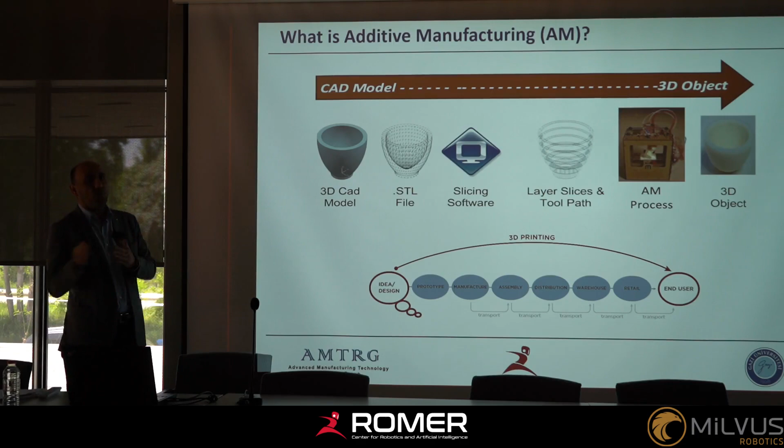At the end of the day, we will have basically smaller or less lead time when we compare to the conventional processes.

Of course, we can do lots of classification on additive manufacturing, some of them technology based and some of them material based, because we are using a raw material to produce the parts. So this is one of the classifications.

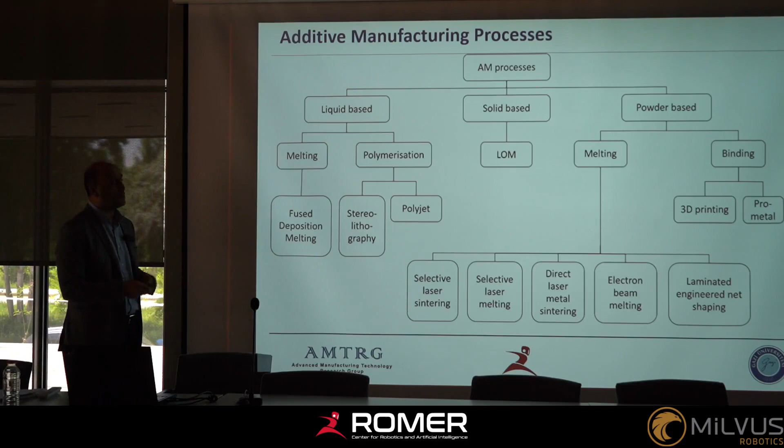This is mainly the material based classification, because some additive manufacturing technologies use liquid based materials like resins, some of them use solid based materials, and some of them use powder or wire type of materials.

But in fact, at the moment there are 7 main additive manufacturing technologies available, and they are commercial as well—they have the machines basically.

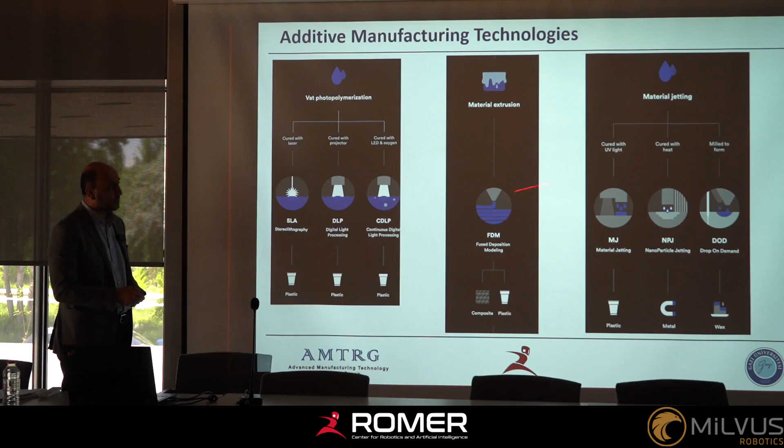The first one is vat photopolymerization. Basically, we are using a heat source or a light to make the resin or polymeric material cure. And we have the material extrusion process and material jetting process—these are mainly using polymeric materials as raw material.

And binder jetting, this is another technology. Powder bed fusion, which mainly uses metal powders, is now actually the most mature technology in additive manufacturing at the moment.

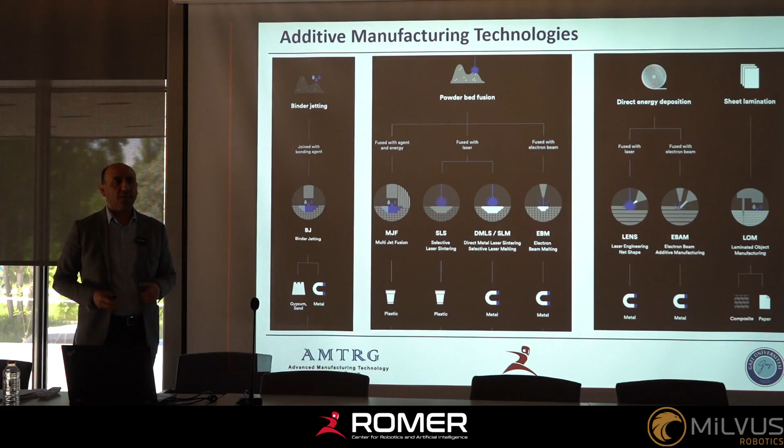And direct energy deposition, and also the sheet lamination process. These, as I said, are the 7 main additive manufacturing technologies that are commercially used in the industry at the moment.

As I said, different mechanisms and different manipulations are used to make the 3D parts. When we use the material as polymer or composites, basically we either use light, laser, or ink to make the 3D parts.

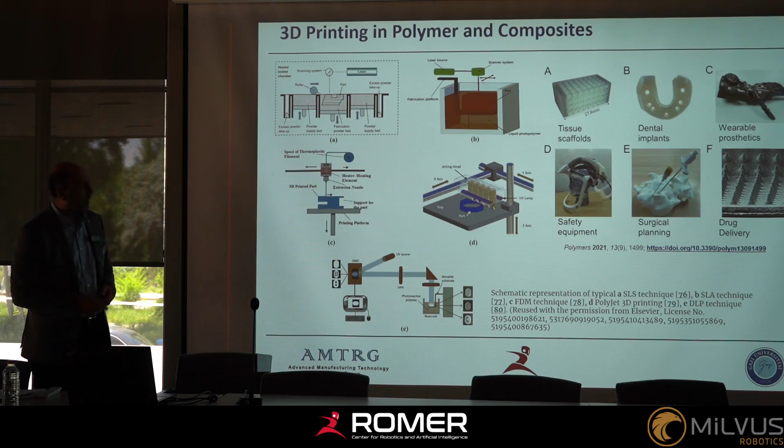But on the metal side, we have to have some energy source, and we use that energy source mainly to produce the part or to melt the metal, either powder or wire.

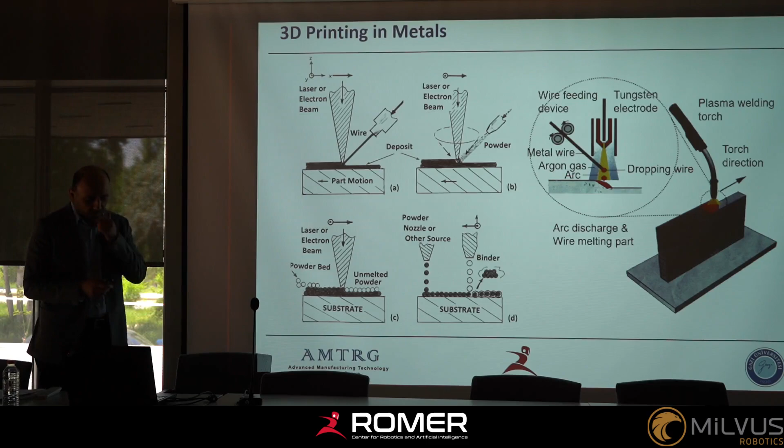So it could be laser, electron beam, or arc, in some cases. We have to have a large heat source to melt the metal, because metal melting temperatures are higher than polymers. So therefore on the metal side, basically we generally prefer to have high heat sources.

Of course, when we compare each additive manufacturing process, there are some advantages and disadvantages between each other.

For example, if you would like to produce a complex geometry, powder bed fusion process gives a high rate of complexity, but on the other hand, WAM, which is wire arc additive manufacturing, gives less complexity.

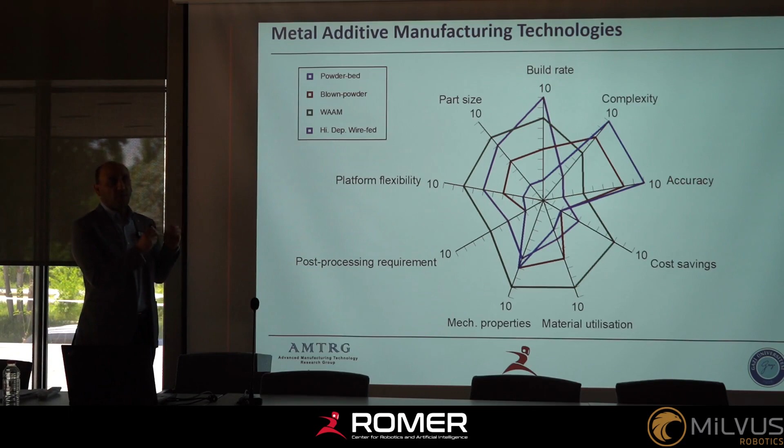But when you take a look at the part size, the WAM process may have more advantage—the position, build rates, platform flexibility, mechanical properties, these may differ. So therefore, we choose the proper additive manufacturing process based on our design considerations, and where and for what purpose we are going to use it.

And of course, researchers like you and us try to make them as mature as possible and spread them in the industry, to make them applicable in real parts or functional parts.

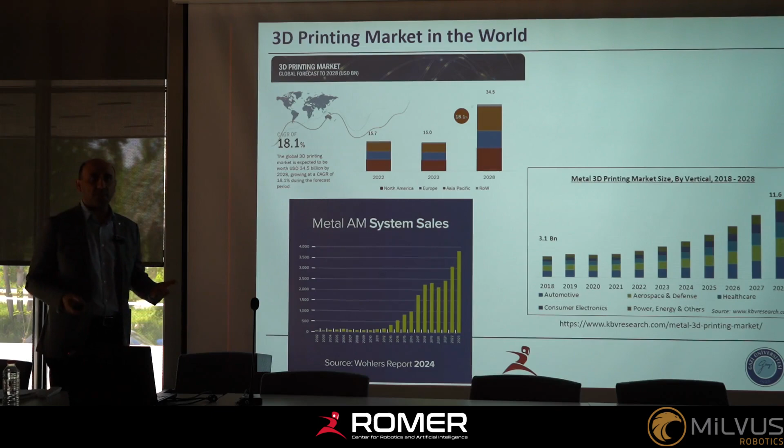But metals are now growing more because the metal part is more functional than the polymeric part. We use polymeric materials generally for rapid prototyping, but metals are used mainly for functional parts.

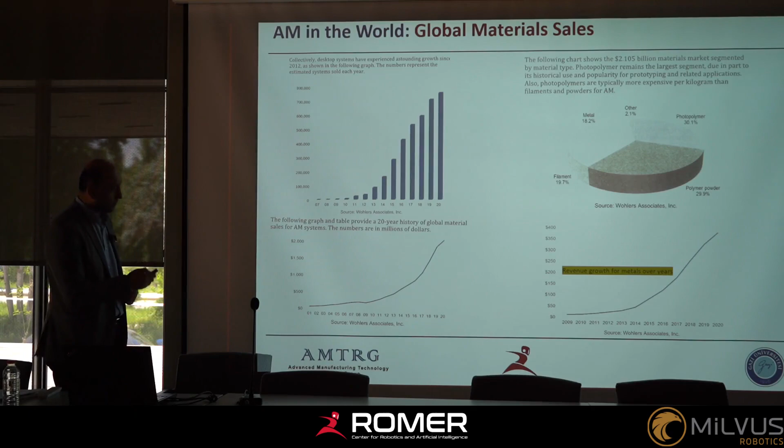These are some of the metals we currently use in additive manufacturing, like stainless steel, aluminum—these have the largest percentage—and also titanium. Titanium is mainly preferred by the aerospace and defense industry. Stainless steel is common for die molds, and aluminum is also used for die molds and for prototyping as well.

But there are also lots of other materials getting some percentage of use as raw material, like stainless steel, Inconel, which is a nickel-based alloy, tool steel, and some Hastelloys, etc.

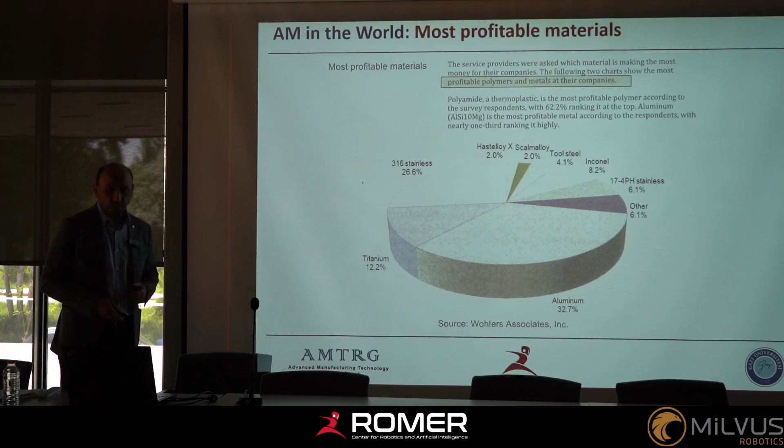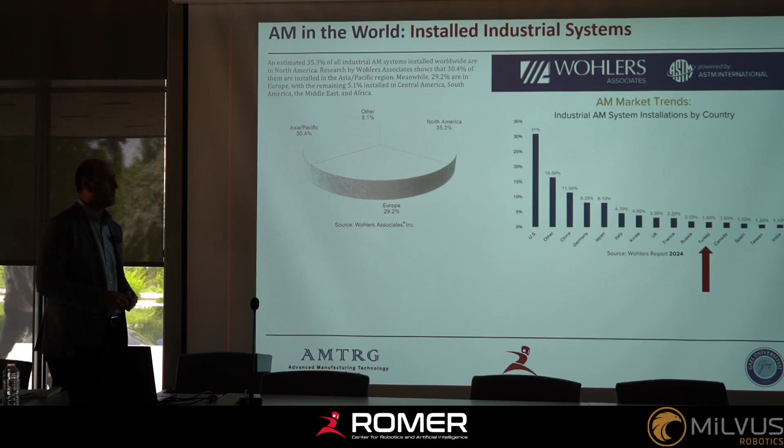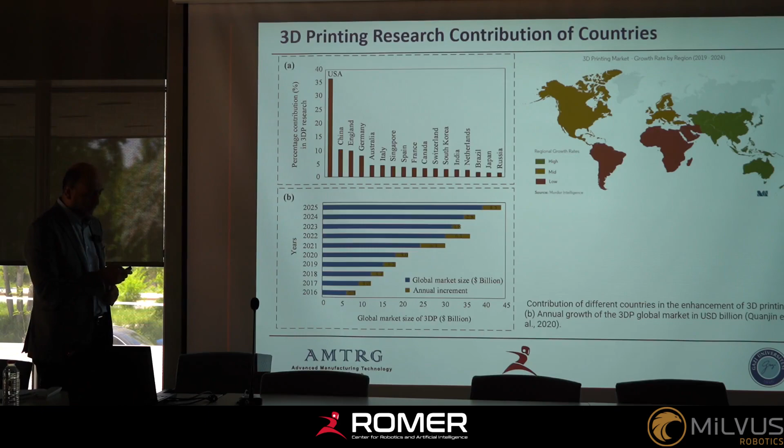These are some other statistics on how 3D printing research has contributed over the years—as you can see, lots of papers are appearing in journals. So it's a hot topic trend in research and also in academic papers. Okay, so that's it.

Well, now I'd like to mention what we do. I have a research group which I call AMTRG, Advanced Manufacturing Technology Research Group. When I came back from the UK, I founded this research group. The members are mainly my MSc, PhD, and postdoc researchers.

So what we do basically—I have almost 20 students, some postdoc, some PhD, and some MSc students. A few of them are staying with me, and some come from companies like Aselsan, Tusaş, Roketsan, etc. I also have some postdoc researchers, some of them my former PhD students, but I have two postdoc researchers with me as well.

What we do basically is focus on metal additive manufacturing and additive manufacturing in general. For example, in one of my research works, we mainly focus on how the laser interacts with the powder, because when we produce parts, we have to melt the metal. In the melting process we use a heat source, the laser, and we study how it interacts with the powder, how a melt pool is produced on the metal surface or layer, and how we can get the proper process parameters to obtain high quality parts.

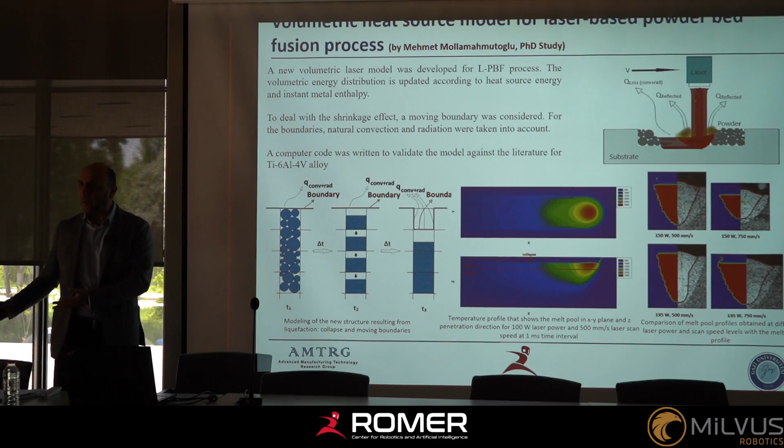This research work involves multiphysics—we sometimes try to derive thermal equations, we deal with the metal powders, and we deal with the laser. So therefore this is multiphysics.

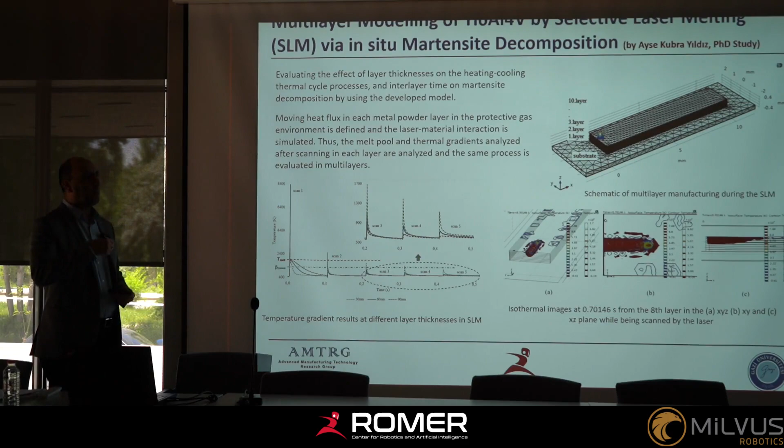In another work, we try to determine that because when the laser interacts with the powder, it melts it, but the molten powder solidifies very soon, in milliseconds. So the phases formed are basically the core of the mechanical properties—if you control the phases, you may control the mechanical properties. So in this PhD work, we try to control the phases during solidification, with the final aim of obtaining the proper parameters and conditions, and planning the process to get the best quality parts.

On additive manufacturing, the surface is not good because we use powders. So when we take a look at the as-built surfaces, they have large surface roughness, lots of waves. We don't like it because as a mechanical requirement, we need very smooth surfaces in order to have good mechanical properties. So we search for how we can improve it.

One solution is laser. We use laser to make a remelting on the surface and polish it as much as possible. This is the new technology, actually.

We tried this a couple of times and did a few projects. One of my former PhD students, who has now graduated, worked a lot on this topic. We directed the laser beam on the surface to create a thin remelt layer, which produces a smoother surface compared to the as-built surface. We call this laser polishing. Of course, it is still under research because we face problems like cracks due to high solidification rates, which we don't like, but we still work on it.

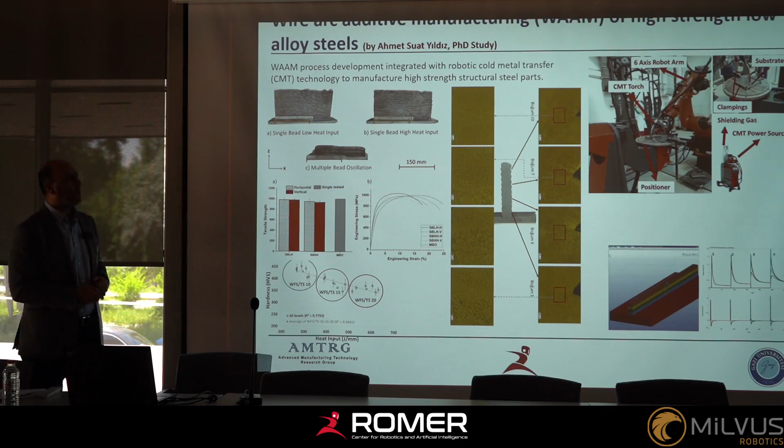Another of my research works uses WAAM, where we use robots and an arc heat source to melt the wire and produce the part layer by layer. We did a lot of mechanical and metallurgical tests to determine how to improve it, which process parameters to use, and what kind of heat source or heat input we need to give the material to achieve proper conditions on the parts. So we did a lot of tests.

In one of my works, we worked on a design approach. This is the conventional design part, although it's also topologically optimized since there are holes in it. But we worked on it and tried to make a new design for additive manufacturing, then produced that part, which is used as a bracket to hold reaction wheels on satellites. This was an MSc work result, but we did it as a project and have results as well.

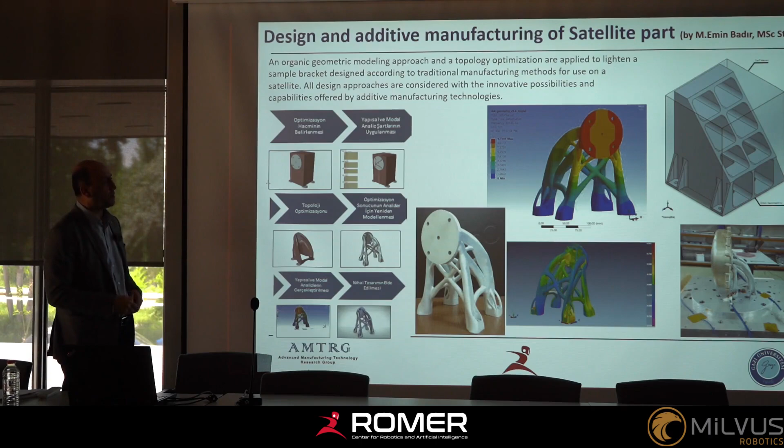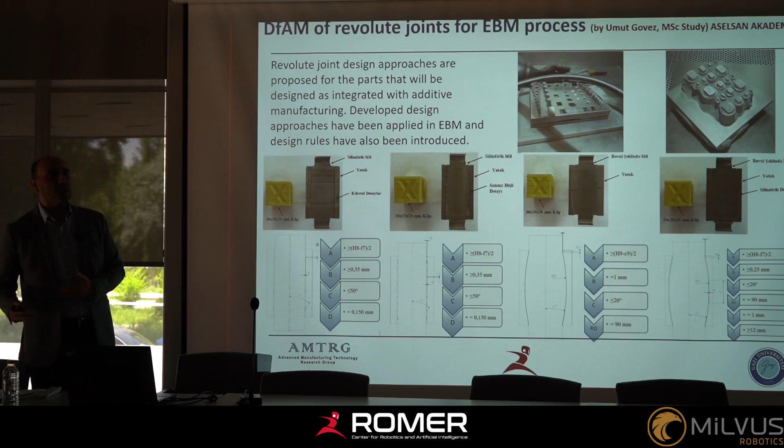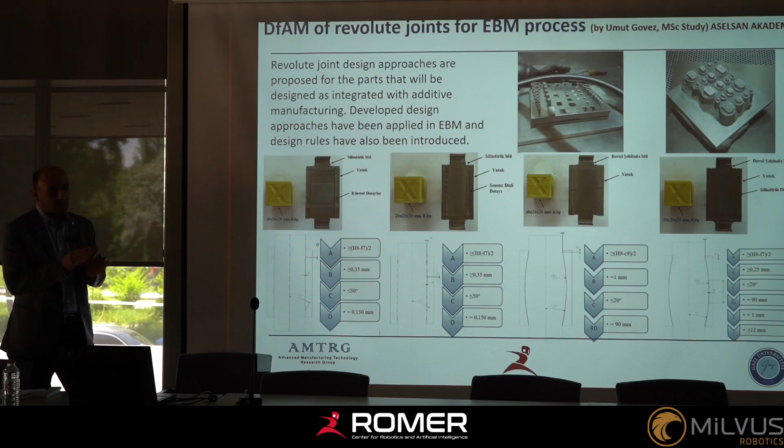In my research work, I collaborated with Aselsan and one of my MSc students to design parts that are already assembled — meaning revolute joints. We tried to obtain the correct process parameters for such revolute joints. There are two options: you either produce the parts individually and then assemble them, or you produce it as a consolidated part. We prefer the consolidated design because it's cheaper and faster. This is also a new area in additive manufacturing, since there are gaps in that field, so we focus on it.

In another research work with my students at Aselsan, we worked on sheet metal lamination. We use ultrasound to perform the welding process, bonding sheets together, which is called ultrasound welding or microsound welding. This allows us to do layer-by-layer manufacturing. This is the setup we designed and produced, and we try to use new sheet materials to make ultrasonic additive manufacturing. This might be unique work in Turkey, especially regarding sheet metal lamination.

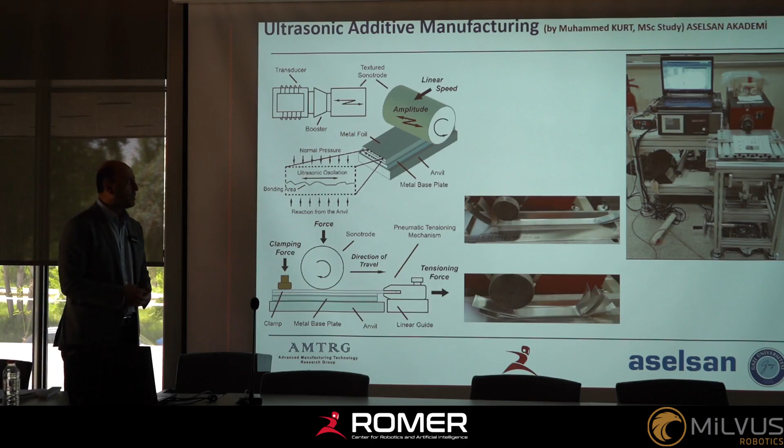We also worked on different designs, because additive manufacturing enables new design approaches. Since we have flexibility in manufacturing, we can create organic shapes. For example, this bracket works under random vibration — normally 3 or 4 parts are produced individually and assembled together, but we produced it as a single consolidated part. We then performed a lot of random vibration tests to check if it satisfies the requirements.

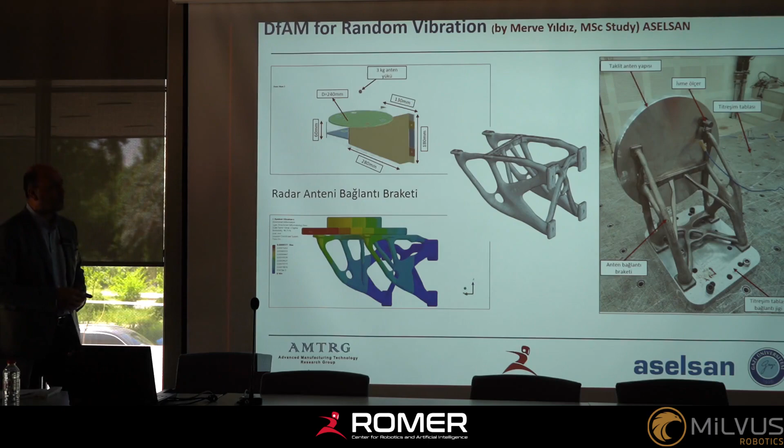Well, basically on the WAAM side, which is wire arc additive manufacturing, which I use a lot, and also my company MetalWorm also focuses on WAAM. I started that work in 2010, which was the first work in Turkey. So we actually designed these, the very old-fashioned design, which I spent 10,000 Turkish liras to build.

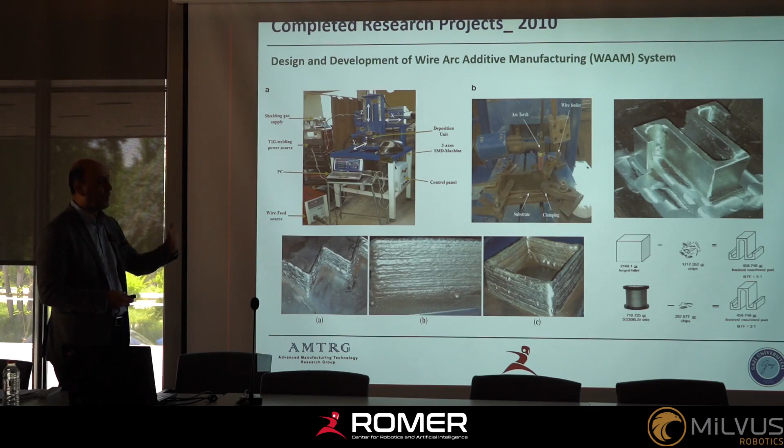But we first did work on the new attempts of how we built the metal layer by layer. And then actually we use robots because it's more feasible and gives lots of flexibility. This is a work that we actually worked on together with FNSS, which is a side project, and then we try to build some big size and large size parts by using robots and welding machine, as you can see, and also a positioner.

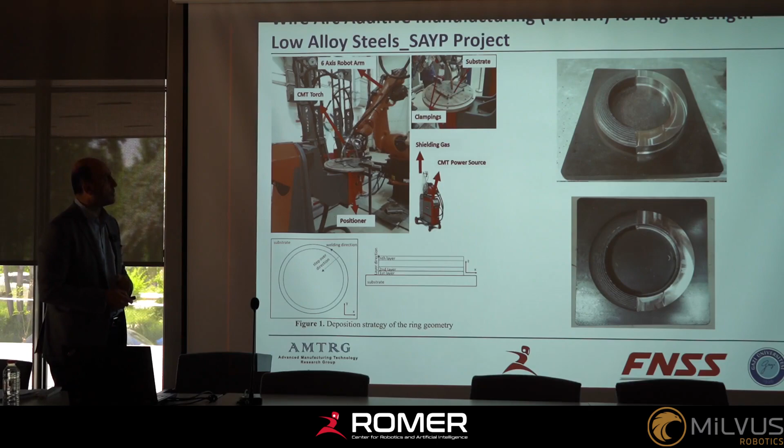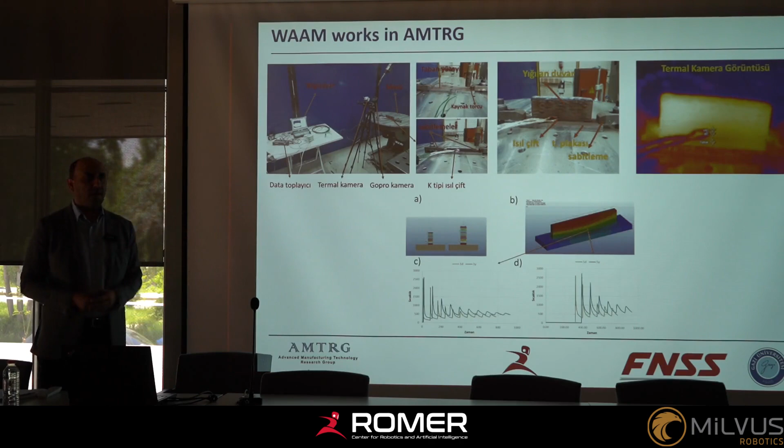So therefore, for this part, only the robot is enough, or maybe the positioner is enough, but in many cases we actually have 8-axis manipulation to produce the parts. We did lots of tests, mechanical tests, metallurgical tests, to actually prove that this process is suitable for production of large-scale parts. And also we got some temperature measurements, because during production we melt the metal, so we apply lots of heat. That heat produces some distortions and unwanted effects, so we have to optimize it.

And also I started work with Intecro Robotics, which we actually started in 2015. We decided that for this robotic-based process, we need to have a machine. The machine should have some hardware and software, but there is a need in the industry, because additive manufacturing is growing, and there are some attempts on the robotic additive manufacturing side, but there is no specific machine for it. So we actually started to work with Intecro, and we submitted a research project to TÜBİTAK, and TÜBİTAK funded us.

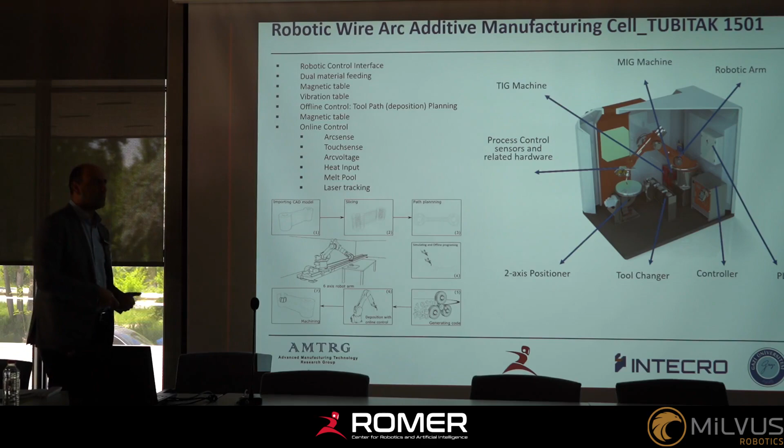And then basically we developed this MetalWorm machine. As you can see here, now we have a robotic system, a positioner system, and we have software on the offline side that we can use to produce robotic tool paths to create 3D objects, as well as process monitoring software, because we need to get some data during the process, like voltage, current, heat source, heat input, layer height, etc.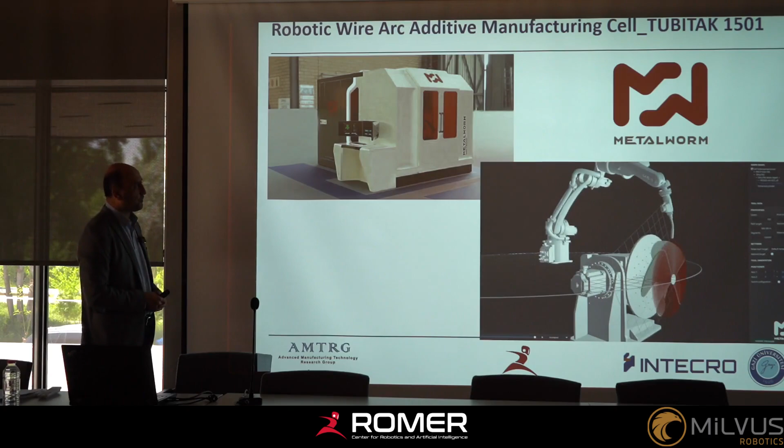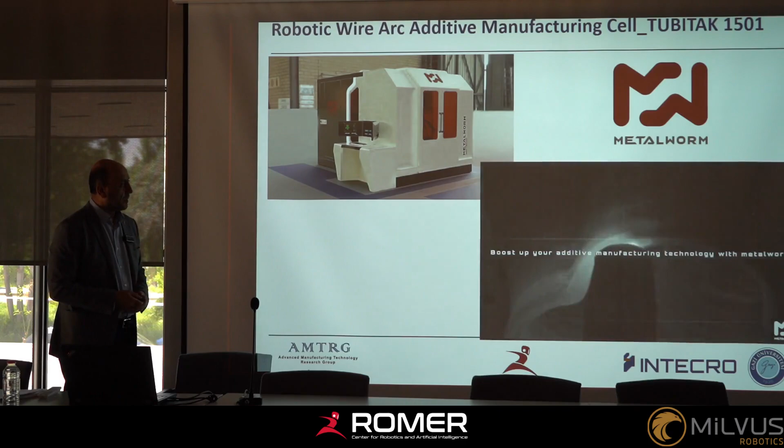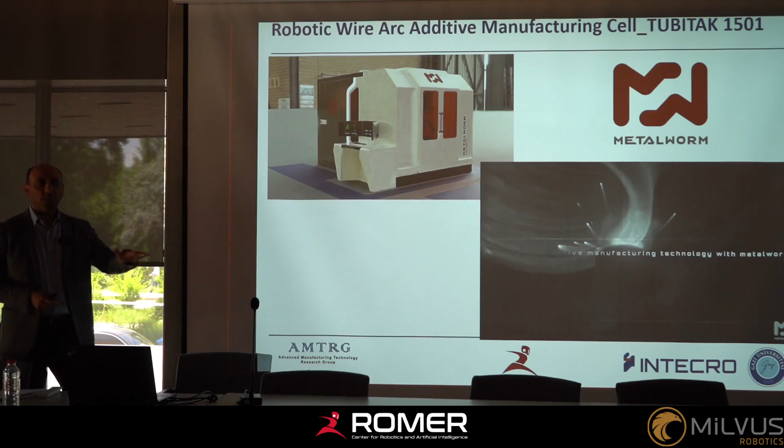This is now a commercial machine, so we try to sell it now, and also we do lots of production by using this machine. Basically, once we released this machine to the market, at the same time in the world there were 3 or 4 companies that released the same machine. So we may say that we all think about the same.

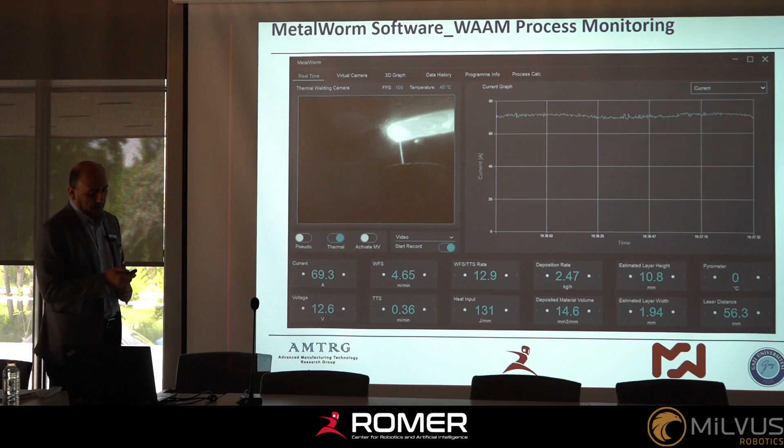And this is the process monitoring software that we use basically. As you can see, we collect all the data from the process, and also we have a welding camera which focuses on the weld pool, and also we can capture the temperature in the weld pool area. It is very useful for us to collect this data and to plan the process for the best applications. And also, as I said, we collect the data so we can create the digital twin of the part.

What we do basically is get the current, voltage, wire feed speed, heat input - these are some of the data that we collect. And then we merge it with the coordinates of the robot, and then we can create that kind of digital twin of the parts. What we use it for basically, in additive manufacturing, we actually do the manufacturing layer by layer.

So in commercial manufacturing processes, especially for the aerospace and defense industry, they need certification. And in that certification, you have to supply all the data that you use in your manufacturing process. So in additive manufacturing, you have to also give all the data for each layer.

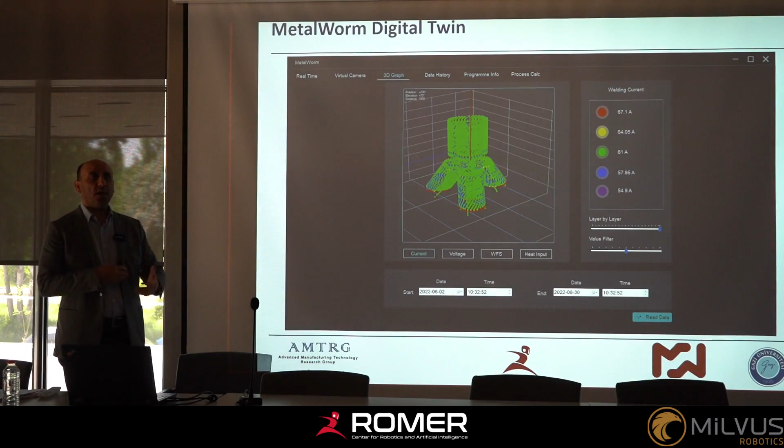So in that case, firstly, we give all the information or all the data, as I said, for process parameters for each layer, as well as we may check it for quality control as well, because you may have some intervals for each data, and if you are going to see some kind of peaks, you may actually check your part and then see what will be wrong in the process. So therefore, it could be used for quality control as well.

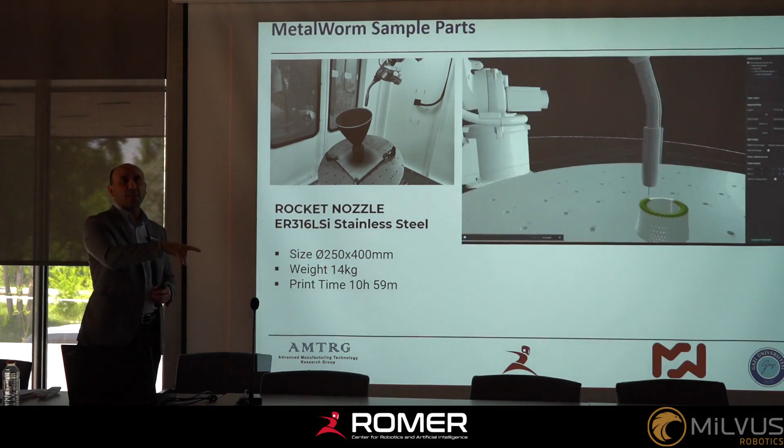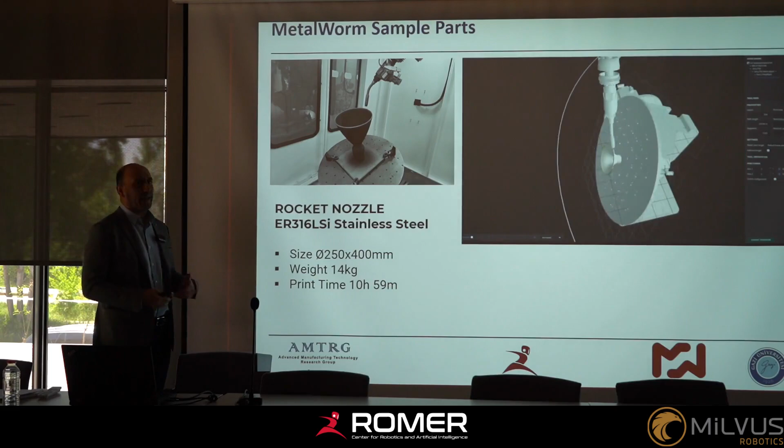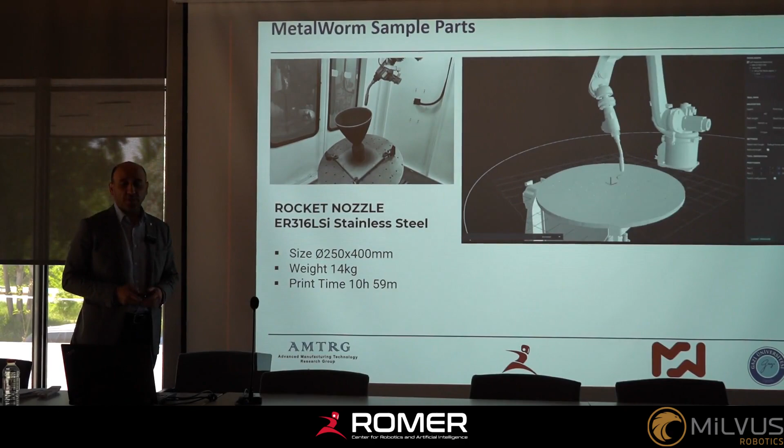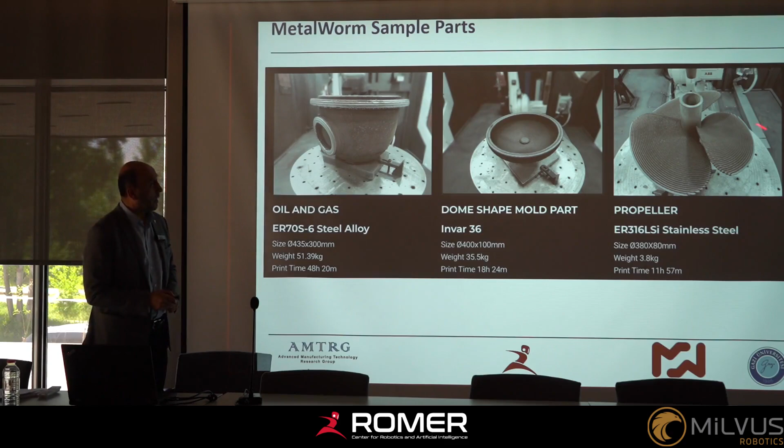By using metal WAAM and robots, we can create different functional parts. This is one of the oil and gas parts. This is one of the metal composite die parts which we produce for TUSAŞ, Turkish Aerospace. And this is one of the propellers that can also be used in marine applications.

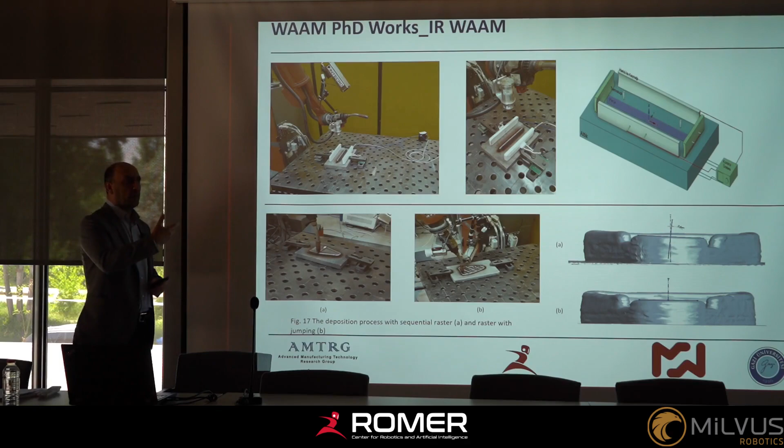On the WAAM side and the robotic side, we try to improve the process as much as possible, because we observe that we apply lots of heat, so we have to control the solidification. In my PhD research work, we worked with metal foams to make a heat barrier, so we try to cool down the parts as slowly as possible. Then we control the residual stresses, the solidification, and the microstructure formation as well.

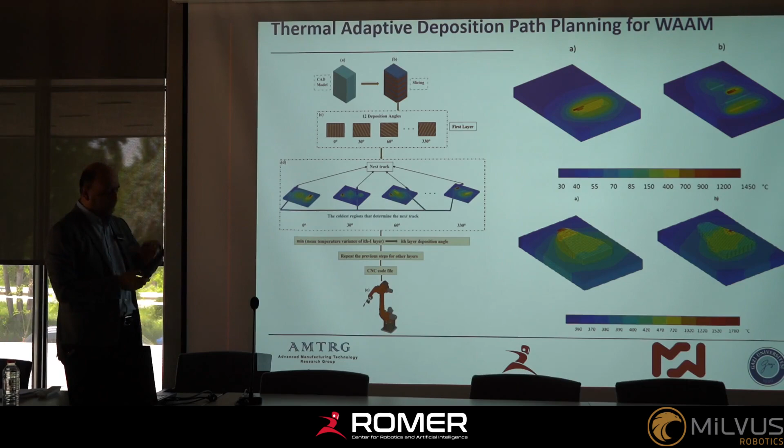In another work, we observed that when working on a small area, you apply lots of heat on it, which causes distortion, warping and some faults. So we tried to make an adaptive toolpath planning on the robotic side. This is another one of my PhD works with my students. He developed an algorithm that senses where the heat is dissipated more, so it produces another section of the part, builds some layers, then comes back again and produces more layers. By doing that, we try to dissipate the heat as much as possible to reduce distortions and make the geometry as neat as possible.

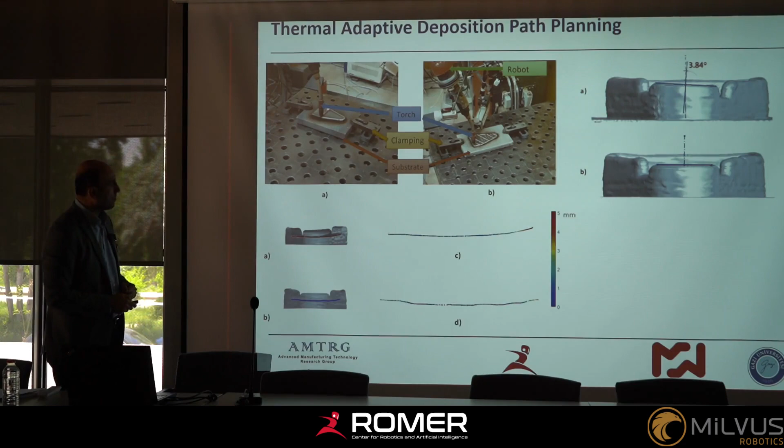I also work with TUSAŞ on some critical parts on the powder bed side, and with TÜBİTAK Uzay, where we developed a reaction wheel bracket, because on each satellite there are 4 brackets that hold the satellite to the platform. These reaction wheel brackets weigh about 4.6 kilograms, and when we redesigned it using biomimicry, we reduced it by 1 kilogram. In a space application, 1 kilogram can be worth $10,000 or more, and since there are 4 brackets, we save 4 kilograms. This is how we designed it and processed it.

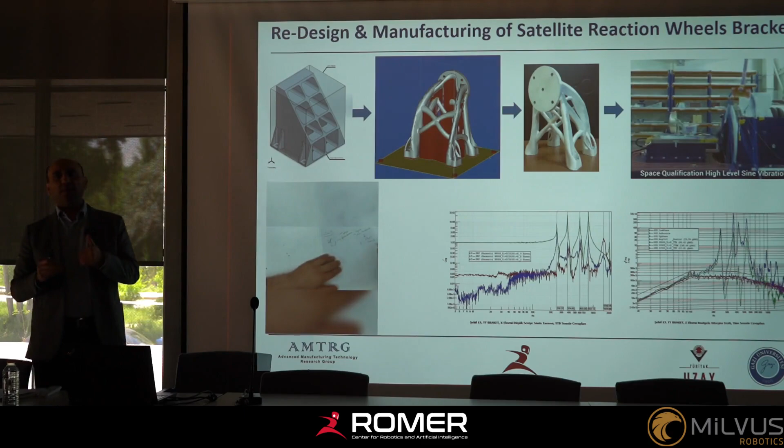This is more important because once we designed it, we first considered that it would be under vibration, specifically sine vibration where it moves like a sine wave. When we tested it, we got cracks on the surface around here, and we realized something was wrong with the design. They asked if we had considered random vibration, and we said no. They explained that while there is sine vibration, in some cases the frequency and amplitude may also change. So we redesigned it, reproduced it, and tested it again by shaking it like this. It's a really high level test, and as you can see, the part passed now.

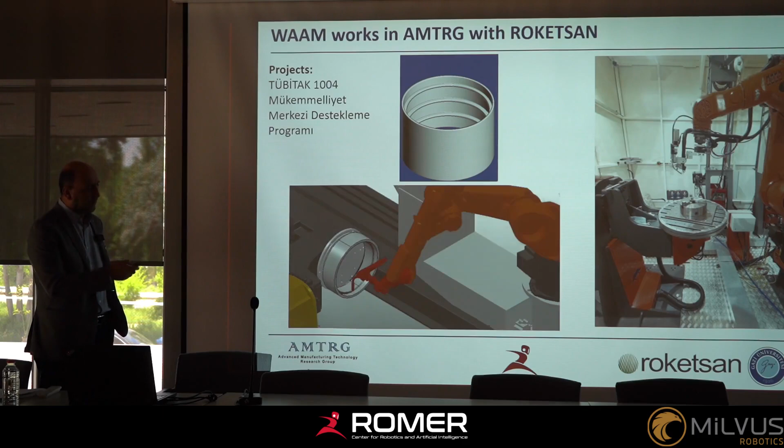I also work with Roketsan on the TÜBİTAK 1004 project. In this project, we try to generate toolpaths on a sample part that could be used in Roketsan's defense applications. The project mainly involves generating toolpaths for the robotic WAAM system, since they have a WAAM system as well. I started working with Roketsan about 8 years ago, and they now have 2 systems, with heavy focus on WAAM.

On the surface side, we had a project with TEI in Eskişehir, where we again tried to reduce the surface roughness of metal AM parts using electrochemical machining. We removed material at the atomic level and tried to reduce the surface roughness as much as we could.

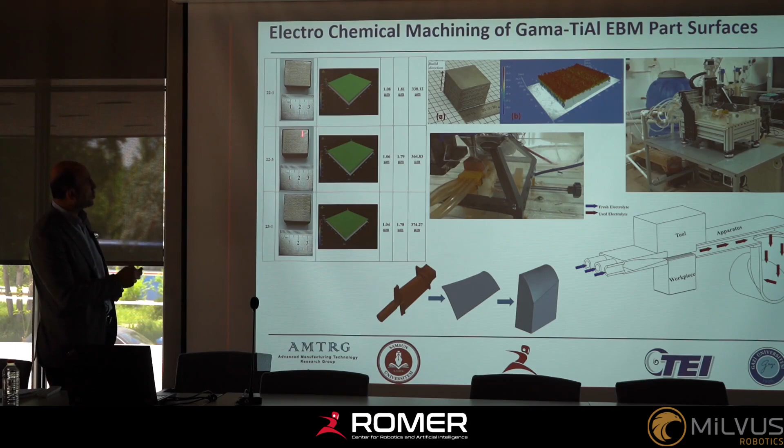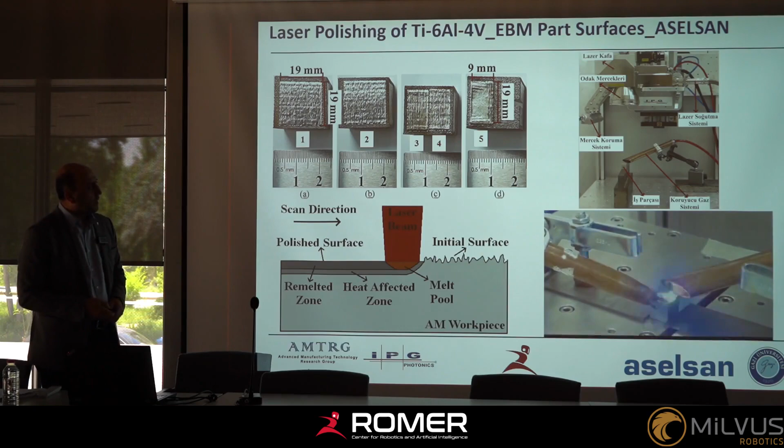After completing this project, TEI also got interested. Then we got a 6-month research project where we worked on titanium aluminide, a very unique material. We tried to polish some surfaces, and in that project we used robots to manipulate the laser heads, as you can see here.

Although we generally prefer laser polishing on flat surfaces, in this project we also focused on form surfaces, trying to polish blade surfaces. Since they produce the blades by additive manufacturing, the surface isn't good, so they want to make it as smooth as possible.

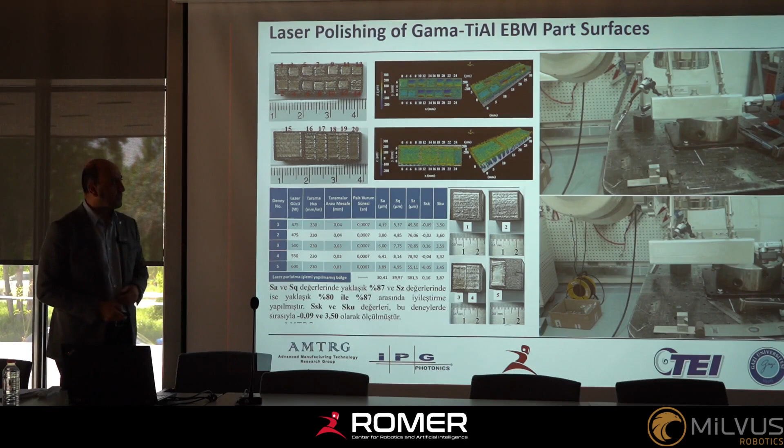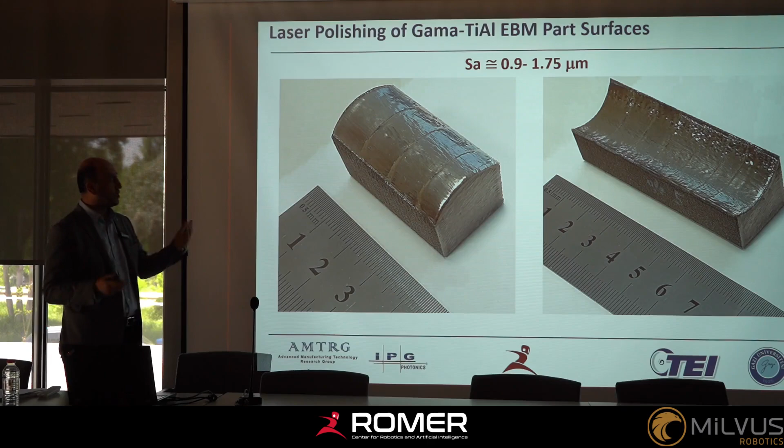These are some of the convex and concave surfaces that we polished. It's still not a mature technology, it's under research. As you can see, there are patches and lines—these aren't intentional, but we're trying to make the whole surface polished without lines like this. So we still work on it.

On the laser side, we continue working to give some parts higher fatigue strength and life, so we work on laser shock peening. Basically, we take additive manufacturing parts and send laser shocks, like bombarding them, to produce compressive stresses on the surface, which increases the fatigue life.

We did lots of tests on it—this is one of my TEI projects again, and also my PhD student's work; he's about to finish his PhD. We observed that we actually produce compressive stresses, which are very beneficial for improving fatigue.

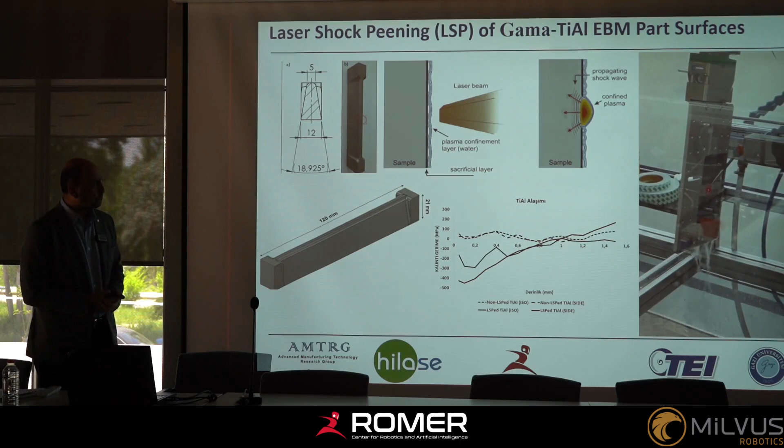We worked with HiLASE, a research lab in Czechia. It was a very good collaboration.

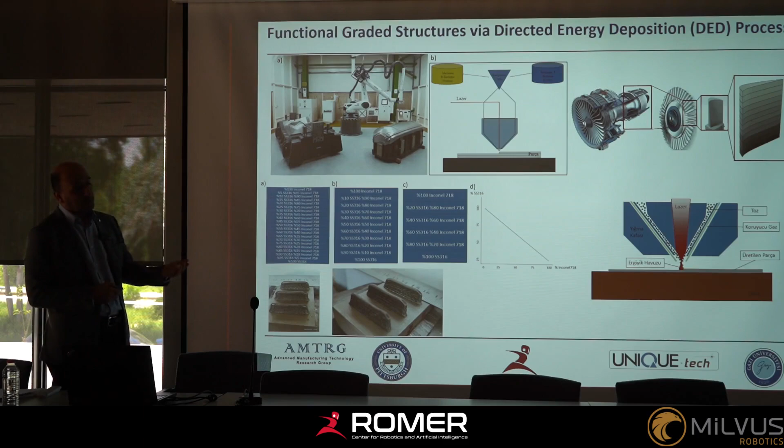We still work on the DED side. I work with UniqueTech to produce functionally graded parts, aiming to produce blades or aero engine blades using differentiated properties of the parts, mixing different materials like stainless steels and Inconel.

I also work with Coşkunöz's company—they have robots and DED systems, and this is the first part produced in Turkey by the DED process. This was also a European project, and TUSAŞ was one of the partners. We design these parts, then do lots of analysis and tests. This is the near-net shape part, which afterwards is machined, and then the final part is used.

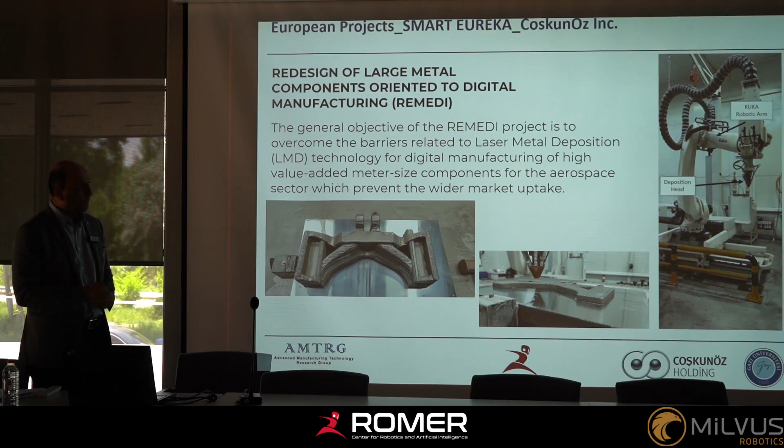We're also involved in European projects like Erasmus, where we try to make a syllabus for an additive manufacturing course across European countries. We've almost finished it—we now have pilot groups where we give lectures and trainings to get some data. This project is now almost finished.

I'm also involved in projects with industry, like Ermaksan. We produced the first 3D printing machine with Ermaksan—this is the first part, the machine.

I also worked with Estaş in Sivas. They wanted to produce another 3D printing machine, and we helped develop it. This is the second machine in Turkey for metal additive manufacturing.

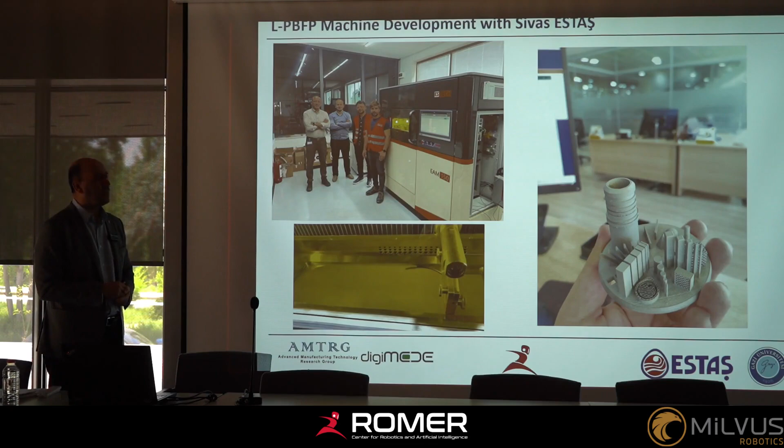We use robots in additive manufacturing a lot, mainly for manipulation. We use 3D printing in construction, furniture, polymer, and metal extensively. This involves programming and manipulating the robots, and attaching cameras, sensors, and lasers to collect data. Basically, robots are very flexible machines or devices that we use a lot in additive manufacturing.

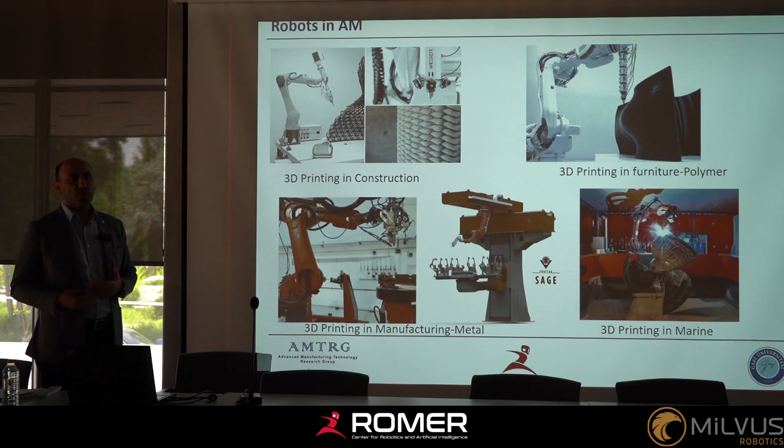Okay, so what could be the future trends in additive manufacturing? First, you could be more familiar with this case. In micro and nanoscale additive manufacturing, this is still under research.

So there's going to be some material jetting, some writing, as you can see, circuits and inductors, and writing some sensors to collect data from the parts. So it would be possible by using additive manufacturing.

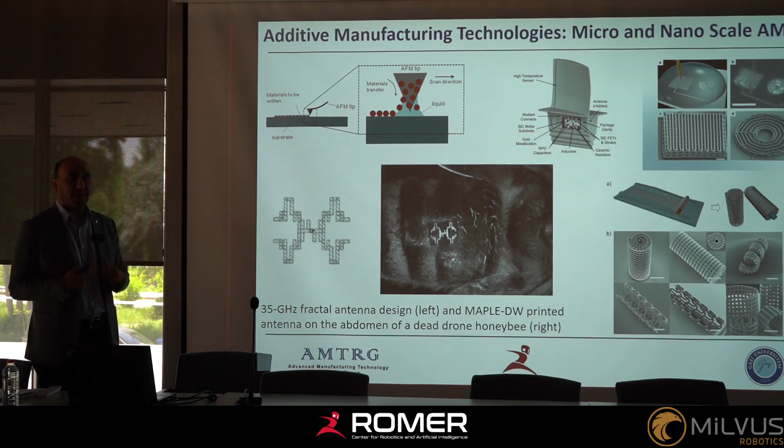Again, there's some smart structures which I already worked a little bit on, the ultrasonic additive manufacturing. What we do basically, we layer by layer put the sheet metal and bond them by ultrasonic welding. But the most important thing is we may actually insert some gauges, some sensors on it, because in other manufacturing processes it is almost impossible. But by using this technology, we could actually add some sensing devices.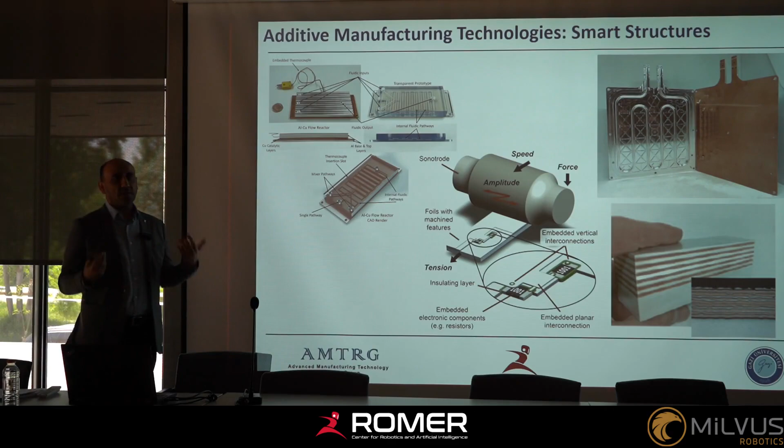So once we produce a part like this, the part is going to be smart. It can sense, it can also emit some information, give some information, take some information, data, etc.

Basically, additive manufacturing is growing a lot, growing very fast. So lots of different designs, very complicated designs, are available. Especially nowadays the engines, the space and defense industry very much focus on this case, because you may not actually have such kind of design using other conventional processes. This is the only process or technology, additive manufacturing, that can produce these kinds of detailed parts.

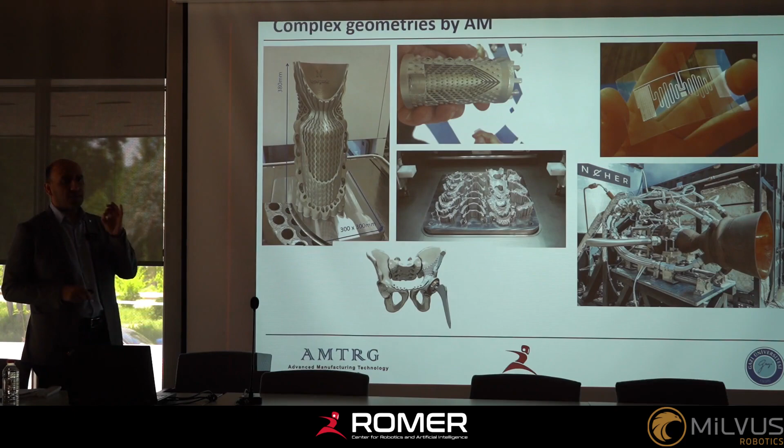And also bioprinting and 4D printing is another topic we can focus on in additive manufacturing. Basically, 4D printing starts with additive 3D printing, but we may also stimulate the geometry by light, by heat, or by magnets. And then there's going to be a fourth dimension that may come. So this is another issue that could be worked on.

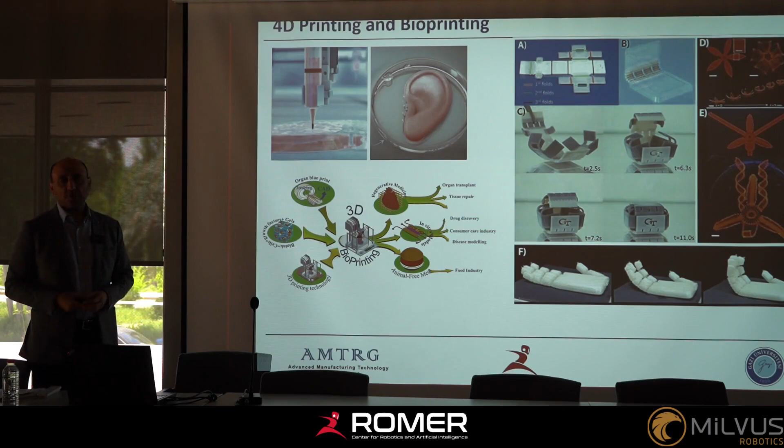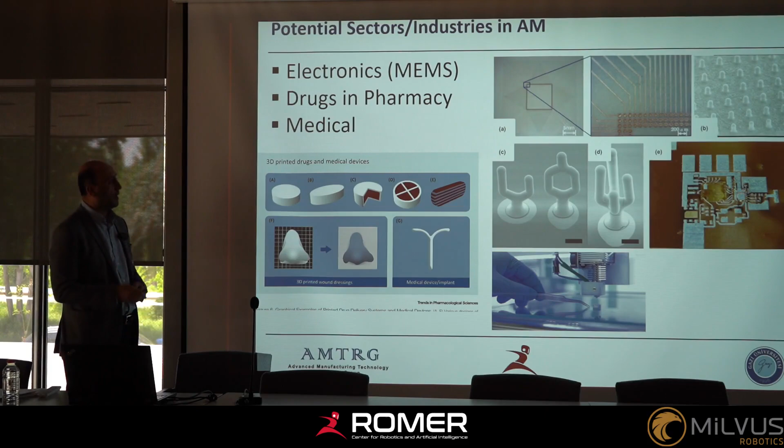There are a few researchers in Turkey who work on bioprinting and also 4D printing. In MEMS, there are lots of alternatives, and the pharmacy and drug industry are also using additive manufacturing, and the medical side as well. There is a lot of potential in additive manufacturing.

As I said, aerospace and defense are very much interested because they like to build large parts, big metal parts, so they invest a lot. These are some examples. For instance, Roketsan as well, or TUSAŞ, or other companies, they like to produce these kinds of engine parts as a single production volume. This is one of the most complicated parts produced so far by additive manufacturing.

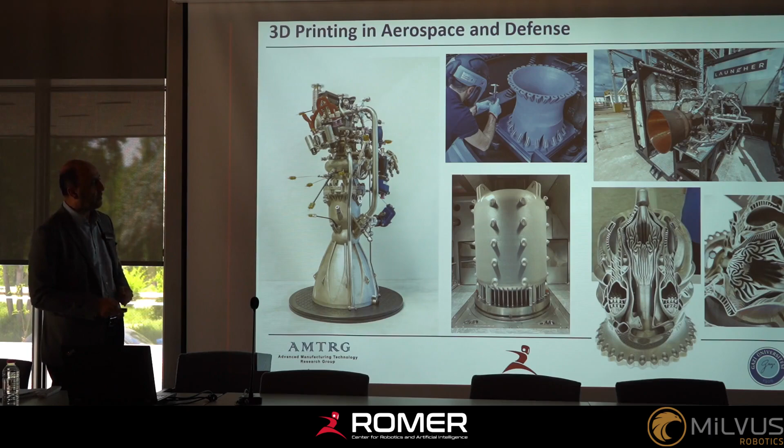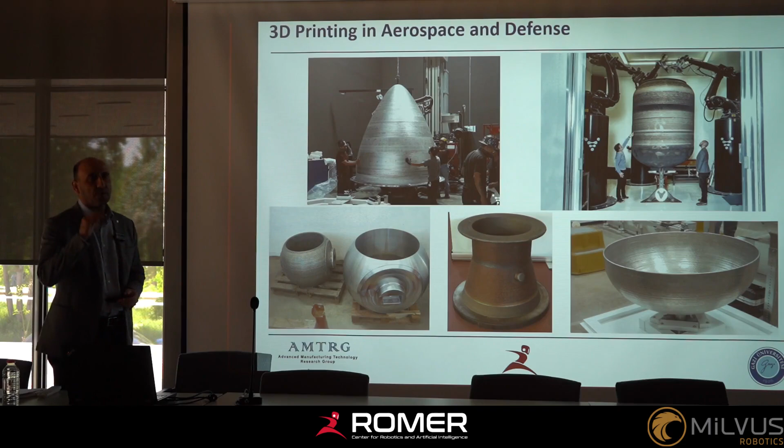These are some other parts, and these are one-piece parts basically. One company in the United States produces these parts as single parts. So this is another potential of additive manufacturing, to create such kinds of aerospace parts.

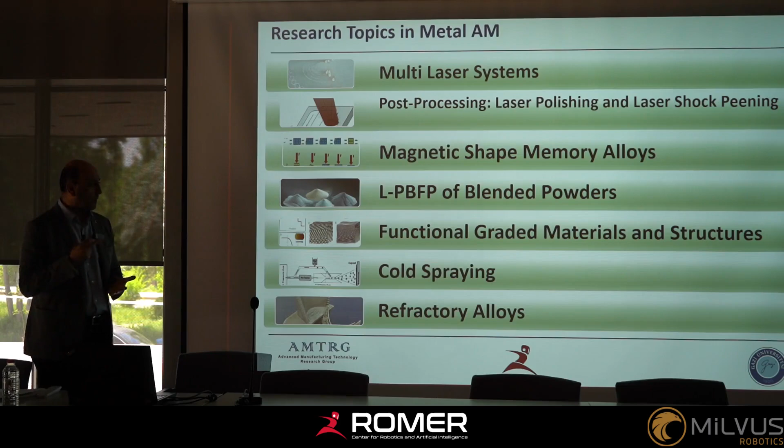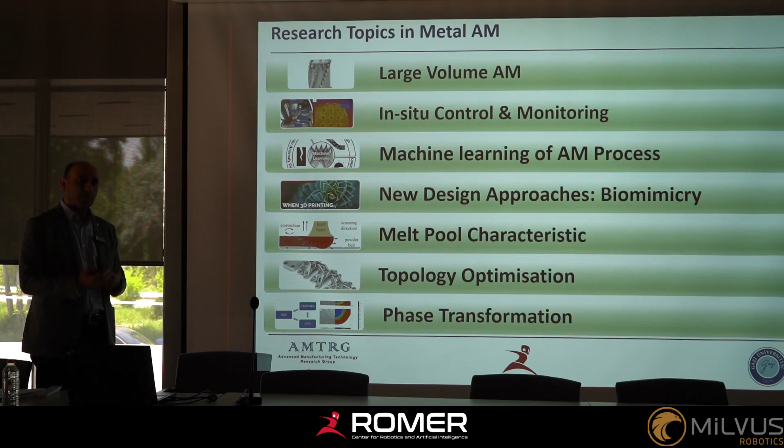Okay, what could be some future topics? Lasers, post-processing, shape memory alloys, and functionally graded parts, cold spraying, refractory alloys, and in-situ control monitoring is a good potential area. Machine learning and deep learning, and biomimicry, and also topology optimization, phase transformation could be there—these could be potential research topics to work on in additive manufacturing.

Well, I work with different companies. Sometimes they give funds to me, and sometimes we work together. So we have some good collaboration with them.

I also work with some other universities, for example, we work with Bologna, Italy, Pittsburgh, United States, Tennessee Tech in the United States, and Fraunhofer. They are very friendly on that case, and also Politecnico di Milano.

We work together, and we also have an association, the Turkish Additive Manufacturing Association. We also organize the Additive Manufacturing Conference, and we are located in Technopark Istanbul, myself and Ulaş Hoca. On the administrative side, we also have Evren Tan from Aselsan, Mustafa Safa Yılmaz from Uludağ University, and Emrecan Hoca from İTÜ, and we have other researchers from academia and also from industry as well.

What we do basically as TAMA is organize the Additive Manufacturing Conference, some Additive Manufacturing Days, some project days, and we also released a Turkish-English term dictionary. And finally, we released an additive manufacturing textbook.

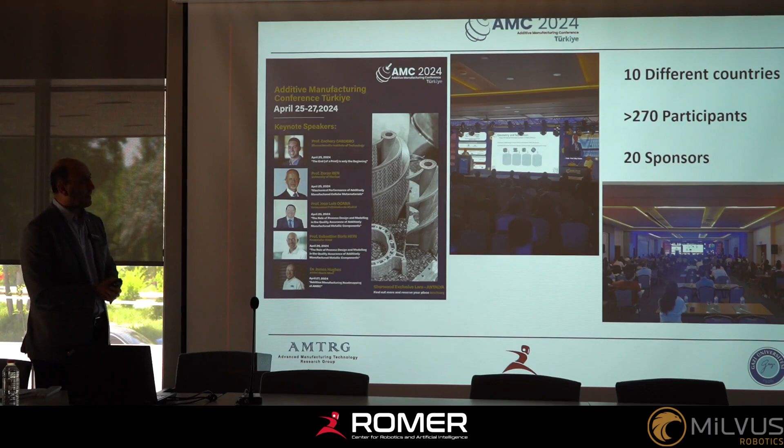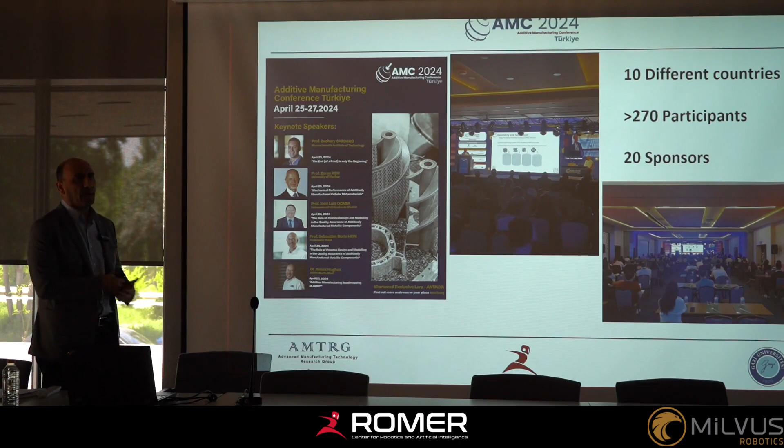This is the latest. A few weeks ago, we organized the AMC conference, and from 10 different countries we had more than 270 participants attend, and there were 20 sponsors. It's a very busy conference when we think about bringing together academia and industry, so there were very good chances for people from industry and academia alike.